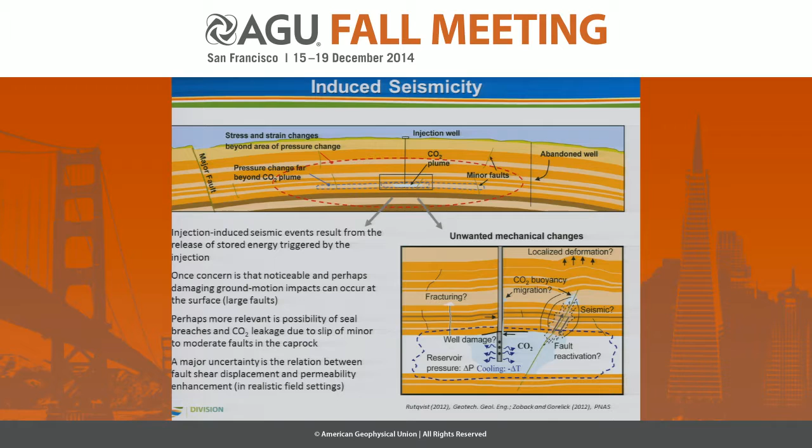The second topic that I want to talk about is leakage and the question of pH-related changes of water quality in near-surface groundwater. We know that a lot of chemical reactions can happen related to increased partial pressure of CO2. Could be dissolution of minerals, could be exchange or adsorption-desorption processes, all of which could mobilize contaminants.

And a lot of work has been done in the lab and modeling work, not so much in the field. And there is quite a bit of interdependence both between these chemical processes, but also questions of transport versus reactions and how that plays out in a heterogeneous environment.

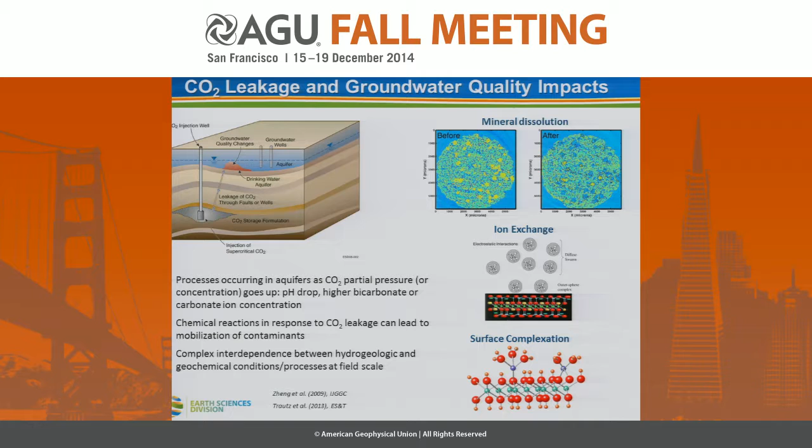So, tiny little detour. Five national labs are actually working together in a consortium called National Risk Assessment Partnership. What we're trying to do is develop quantitative risk assessment methodologies for CO2 storage projects. And so what we really do is compartmentalize the problem, and we do it in two bins, if you wish, one going from the reservoir through leakage pathways

into impacts on groundwater, the other one going through the reservoir and pressure buildup, then potential slip along a fault plane, and then we either look at the ground motion impacts, or if we have slip and permeability changes, we funnel that into this other compartment and again look at the impacts to groundwater.

And the reason I bring that up is that we've really seen that this uncertainty here and also the impact uncertainty of groundwater is one of the major uncertainties in this entire context. And so what I'm talking about in my remaining 7 minutes and 56 seconds is two experiments that were conducted in the field, both controlled release experiments. So let's start with these fault activation studies.

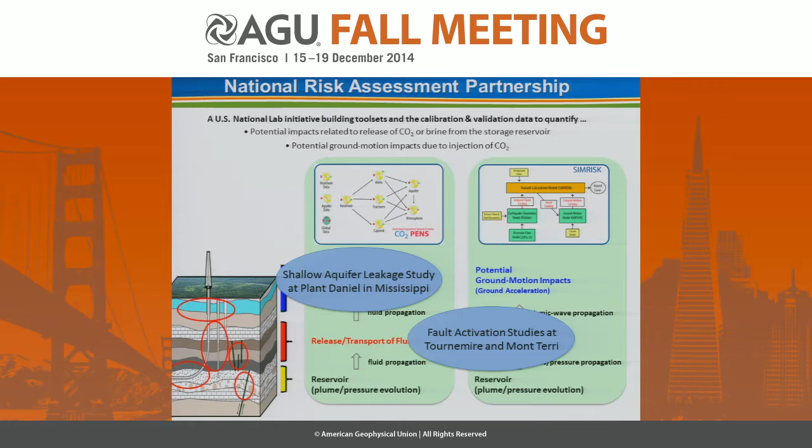One of them has been conducted in an underground research lab, in fact, an old railway tunnel in southern France. So this is an experiment that is conducted in the subsurface in a tunnel, which allows us to get much better access to the actual fault of interest. There will be another experiment next year in another underground research lab, which is referred to as Mont Terri, and it's in Switzerland. Both of these are essentially in argillitic rock.

And I do want to say that this idea of doing intermediate scale field experiments based on tunnel access rather than borehole access from the surface is very common in nuclear waste disposal. It's not so common in other underground energy resources type of research, but there's certainly work starting up, for example, in the field of CO2 sequestration, and this is one of them.

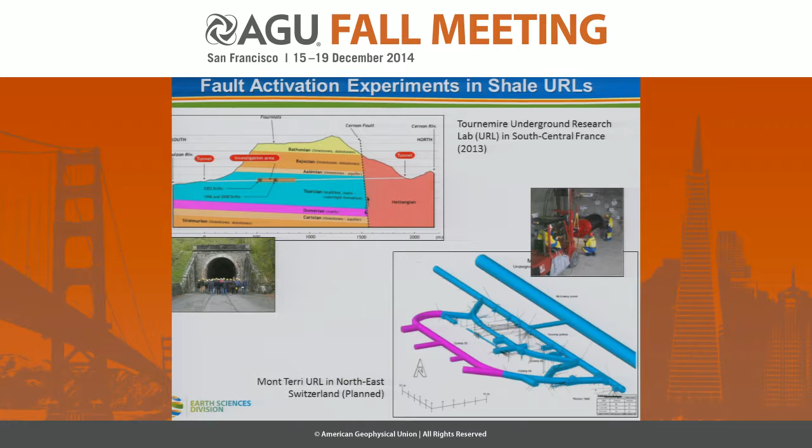So the setup of the experiment is simple. There's a tunnel here, then about 10 meters away is the fault in which a borehole is drilled. Then that fault is pressurized up in essentially sort of steps. And then that will continue until some slip is seen and the flow rate and permeability increases. And there's additional information on that experiment, I should say, tomorrow in a poster session, T33A.

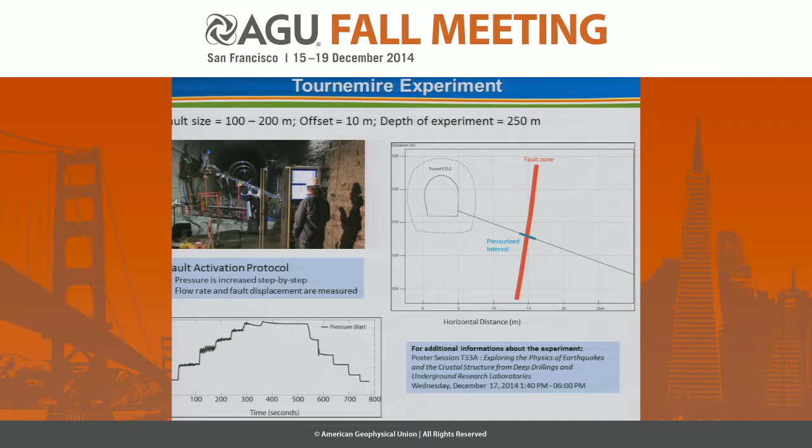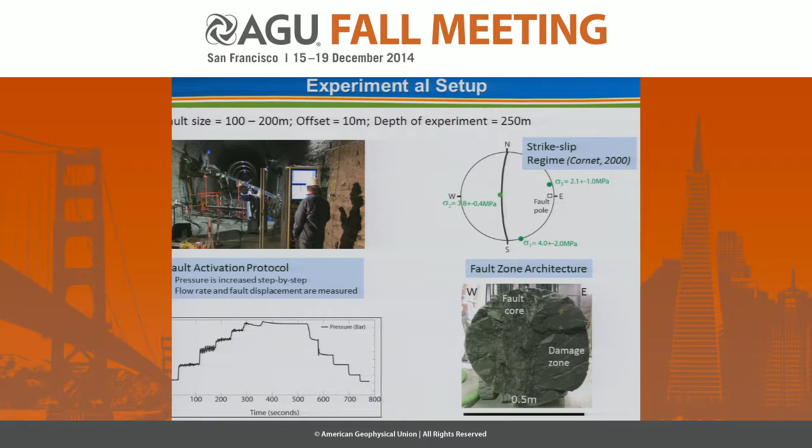This is a photo of the setup as the probe is launched into this borehole. And of course, because we're in a tunnel and we see that fault exposed in the tunnel, we can take large core, we can look at the inner zone, we can look at the damage zone, we can take smaller samples, and we can do a lot of analysis on that.

Now, this is the probe that is being used, and it's a really nice, ingenious device that Yves developed in France. So there's a packed-off section. In this section, you have a very sensitive strain sensor that can monitor 6 components of displacement at very high resolution. At the same time, you measure fluid pressure and flow rate and things like that.

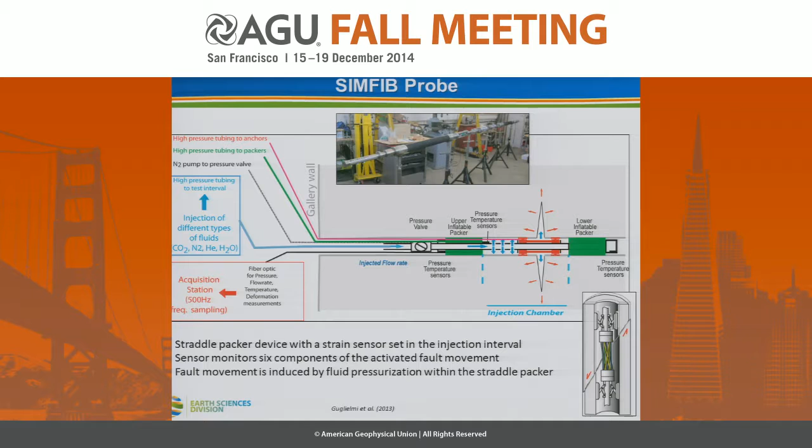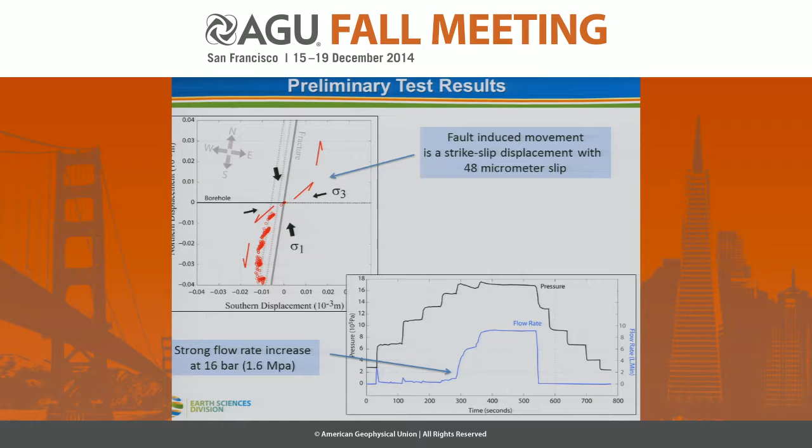As you stop the experiment, there is closure again, but the slip remains. And it's not a lot of slip, it's 48 micrometer, yet you still see that strong increase in flow rate.

And these are some coupled hydromechanical models where Yves and team were trying to essentially represent the results from the experiment. And what they see is that they basically can only mimic those experiments at about 10 to 20 times increase in permeability along that fault, which is quite a bit if you think about that displacement is less than 1 millimeter or much less than a millimeter.

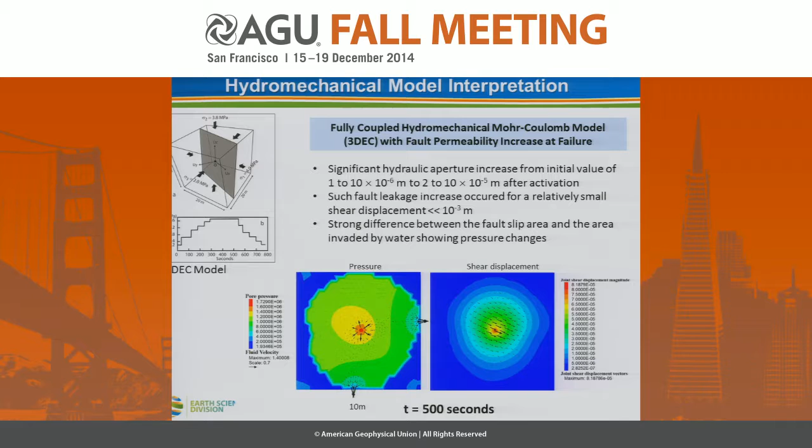So very strong effect. You can also see that the pressure increased area is quite a bit larger than the shear displacement area. I'm very curious how these things would play out over time. Would that fault relax? Would it seal and heal? And I think there's a lot of additional work that can be conducted along those lines.

So that's the second topic here. Sorry, I have to rush through that a little bit. So this is looking at impacts to groundwater of leaking CO2. So this is an in situ study where we essentially inject CO2 charged water, dissolved CO2 in water, into that sort of sandy, silty aquifer about 60, 70 meters deep. The study site is in Mississippi at a site that is owned by Southern Company.

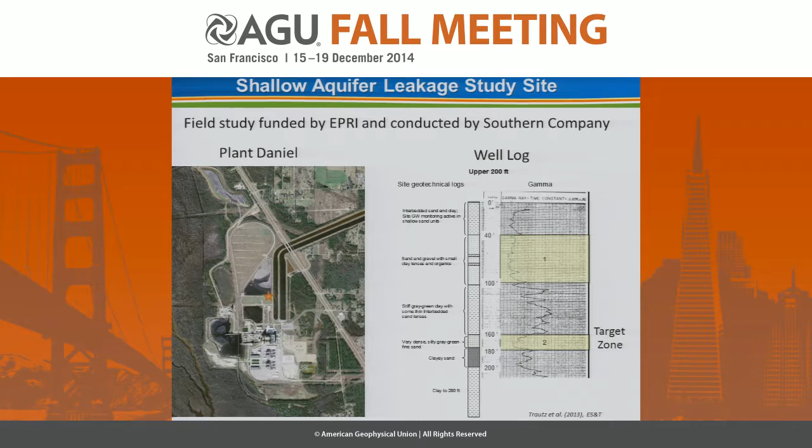And what we did there is we wanted to sort of control the flow a little bit better than we had at the site because there were seasonal fluctuations, things like that. So we decided to create a dipole. We pumped water out of this well here and about 60 meters away injected part of it here.

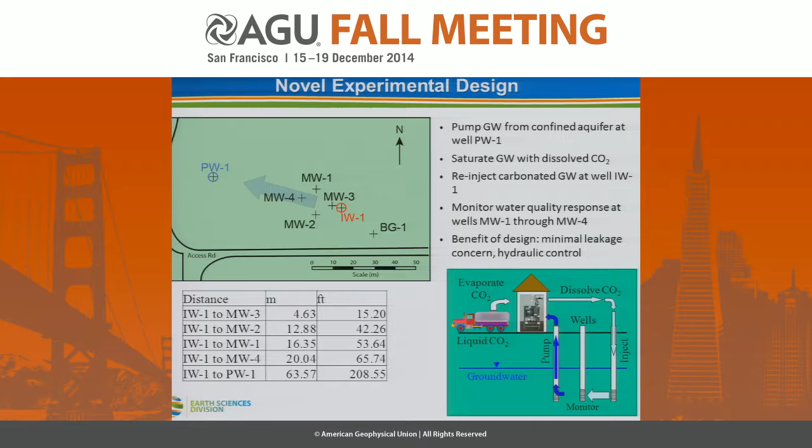Before we injected, we dissolved CO2 into that water and then created essentially a flow path with dissolved CO2 from here to there and had a few monitoring wells in between, did a lot of sampling, some geophysics, tracer tests, etc. Remember perhaps that MW3 is about 5 meters away and MW4 is about 20 meters away. So these are some results.

So this might be a bit hard to see, but here's time. At 0, we start injecting the dissolved CO2 charged water. We inject for about 150 days. And then we see pH drop essentially first at MW3 from about 8 to about 5.5. Not a very well buffered system, so really a relatively strong decrease in pH.

And then what's interesting is that as we stopped flushing that system, that dipole, as we stop injecting CO2, pH stays low. That's because groundwater flow is relatively slow there, and we have kind of a stagnant system as we stop injecting, okay? So here are some major cation concentrations.

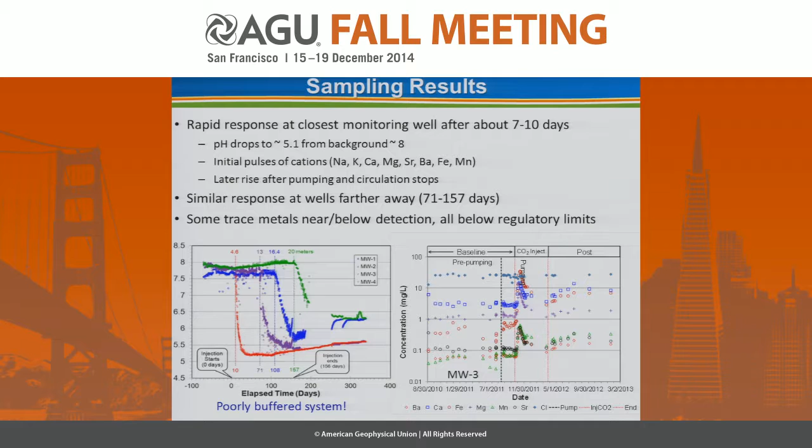All this up to that line is baseline. And then we can see with the injection that we basically see a pulse-type behavior, an early increase, a drop to perhaps a little more than baseline. Then we stop injecting, and at that point, concentrations start increasing again. That was a little unexpected to us, but keep in mind pH is still down.

So we played around a little bit with conceptual models, etc. So what we essentially came up with is that we really have two reactions, one relatively fast, one relatively slow. The fast one is essentially a limited pool reaction, so it could be a fast dissolution of a limited amount of minerals, could be desorption of a limited amount of sorbents, etc.

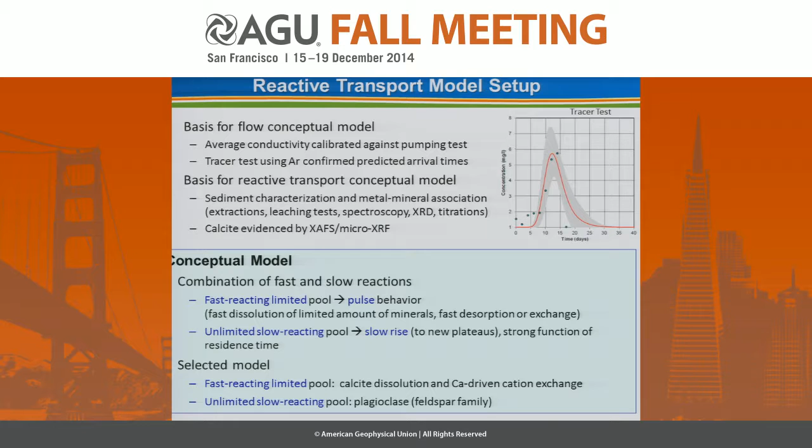That would create our pulse, and then we have a slow reacting pool that at later stages would be responsible for that slow increase. And you see it happen only because the flow rate really goes down and we don't flush our system with fresh water. So if we apply those models, in this case, I think calcite is our fast reactor. Then released calcium will induce cation exchange, and that will increase the concentration of other cations.

Then we see that we mimic that rapid increase and drop quite well, and then we see that slow reacting pool, which in this case I think is feldspar, being responsible for that slow increase. So it is important to realize that ambient flow velocity is relevant in such tests.

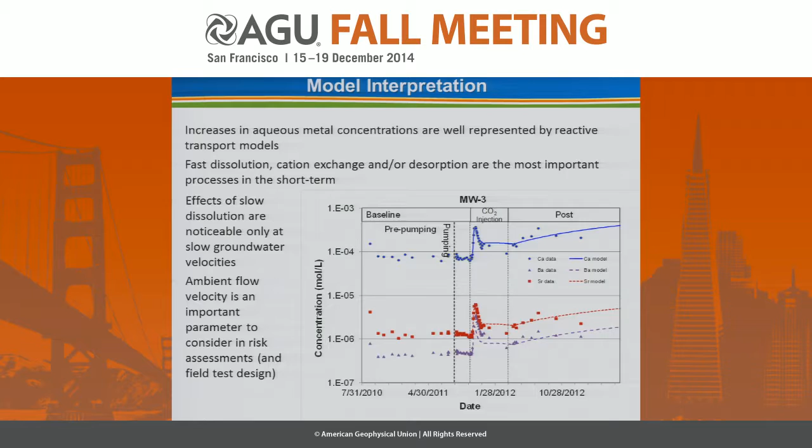I think I have to stop here, right? Is that 12 minutes or 15? There's 15 total, so there's a little time for questions if you stop now. Oh, I only used 12? Well, that's great. All right, so in that case, read my summary.